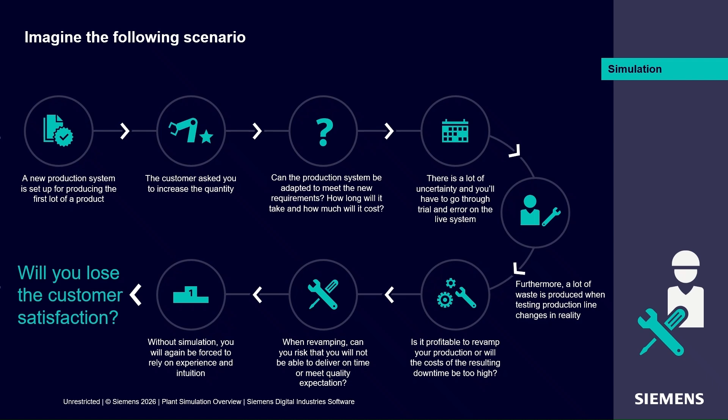This is exactly where simulation tools like Plant Simulation step in, helping you test, optimize, and validate what-if scenarios, and you can validate them virtually before they actually happen in the real world, essentially making mistakes at your desk and saving a huge amount of money.

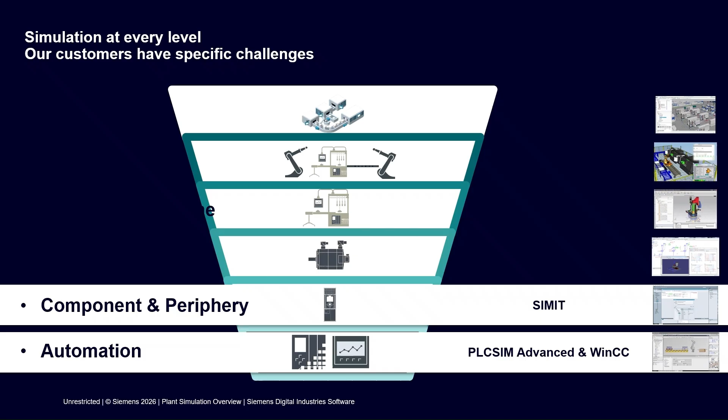PLCSIM Advanced and WinCC enable virtual commissioning and realistic HMI validation against the digital model. At component and periphery level, SIMIT provides realistic simulation of control systems and plant behaviors for testing, and at the component physics level, Simcenter Amesim accurately models physical behavior such as hydraulics, pneumatics, and thermodynamics.

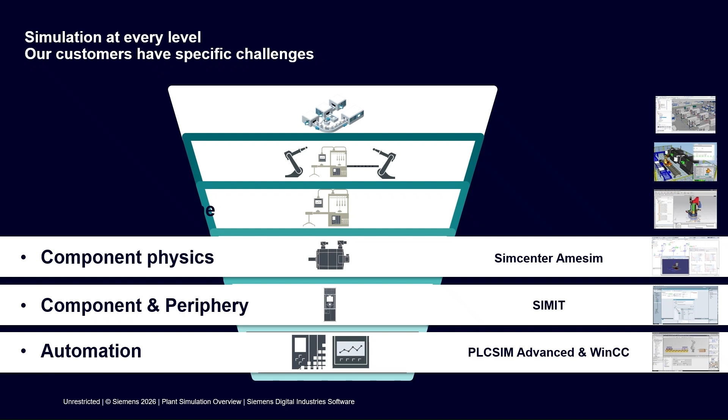NX, which is our CAD platform, and in particular Mechatronic Concept Designer, lets you integrate mechanical design with automation logic to de-risk your machine performance very early. At the robotic cell level, we have Tecnomatix Process Simulate, which allows you to validate your robot paths, human ergonomics, reachability, and cycle times before commissioning.

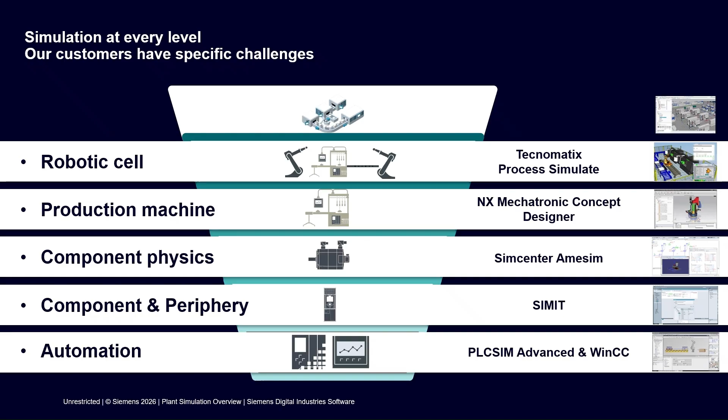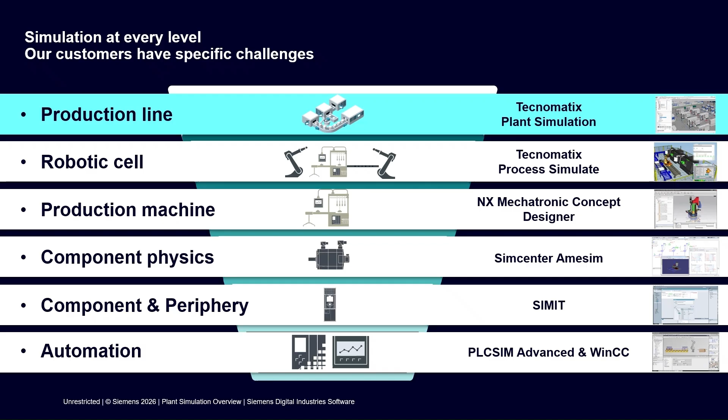And at the production line level, which is our primary focus today, Tecnomatix Plant Simulation enables end-to-end material flow modeling, throughput analysis, and system-level optimization of entire factories. Tecnomatix Plant Simulation is a very powerful discrete event simulation tool.

It allows us to virtually model the entire production environment, including your resources, logistics, staff shift patterns and calendars, and your material flow. With these digital twin models, we can simulate different scenarios and evaluate key performance indicators like throughput, bottlenecks, utilization of your resources, all without disrupting the real system.

We can simulate two types of environments, deterministic and stochastic modeling. In deterministic modeling, you're using fixed inputs, for example, fixed cycle times, fixed transport times, and fixed breakdown intervals. This is useful for your baseline analysis, but it does not reflect real-world variability.

Stochastic modeling, that's where PlantSim truly excels, introduces randomness, uncertainty, and variability. For example, variable process times, machine failures, repair times, and arrival patterns, and you can simulate that all at once. PlantSim's rich distribution libraries, random number streams and experiment manager allow you to run hundreds and thousands of what-if scenarios to understand your risk, your variability, and performance ranges rather than a single point answer.

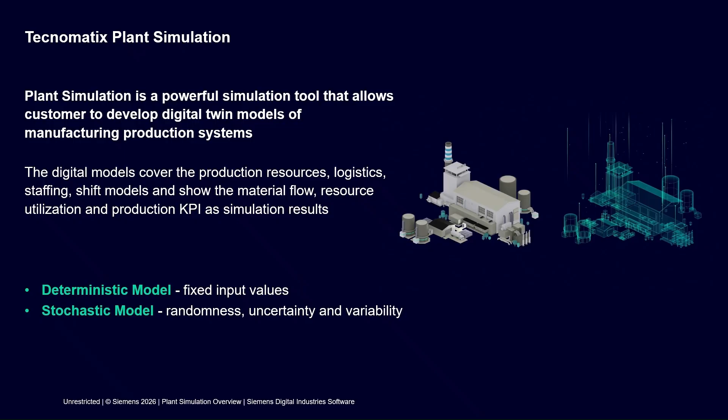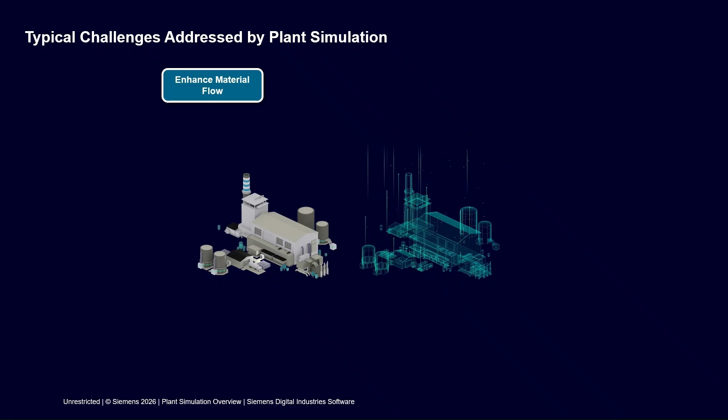Typical challenges which are addressed by Plant Simulation are as follows. You can enhance material flow by simulating different material handling paths for your AGVs, conveyors, and forklifts. You can reduce your throughput time by achieving continuous and efficient material flow, and by minimizing idle times, we can maximize your throughput. And we can look at reducing capital expenses, reducing your footprint, looking at your carbon footprint in Plant Simulation using your analysis tools.

You can optimize your buffers, WIP storage challenges as well, and also process interdependencies, capturing all the dependencies between processes, performing bottleneck analysis and dependency mapping to evaluate how delays or failures in one area affect overall operations, and most importantly, making data-driven decisions because you can rely on measurable insights rather than assumptions or intuition. You can optimize control strategies.

You can look at virtual commissioning, where you can also emulate a PLC to verify your PLC code. Before deploying the code to a physical machine, you can virtualize everything with Plant Simulation and validate it.

And also looking at your worker and operator analysis and your buffer strategies, simulating and testing buffer zones at critical production stages to ensure efficient WIP storage, analyzing buffer capacities under varying production rates to prevent overflow or underutilization, and you can look at optimized buffer placements to reduce transport time and improve overall flow.

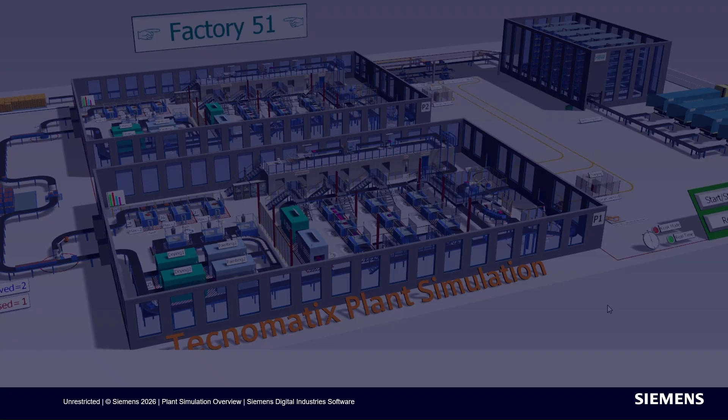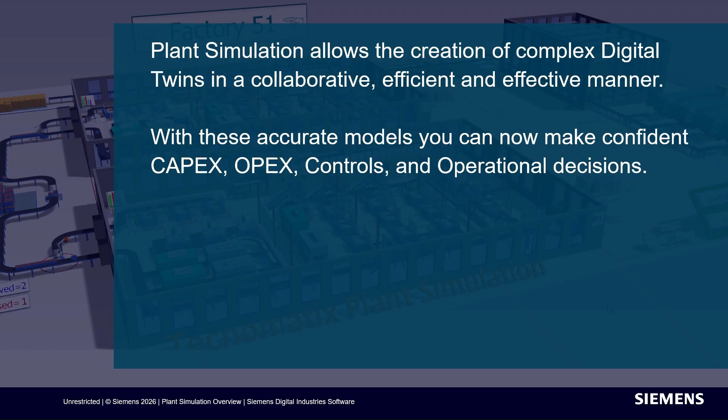Plant simulation enables the creation of high-fidelity digital twins of your production systems in a collaborative, efficient, and scalable way. They are not your static models. They are data-driven, dynamic representations of your real factory, allowing you to make confident CapEx, OpEx, and operational decisions based on evidence rather than assumptions.

What makes plant simulation particularly powerful is its object-oriented architecture, hierarchy, and inheritance, because this ensures models are structured, reusable, and maintainable, even as systems grow in complexity over time. Its control logic flexibility allows you to accurately represent real automation, material flow, and operation rules, keeping your digital twins transparent, predictable, and reliable across the entire production or facility lifecycle.

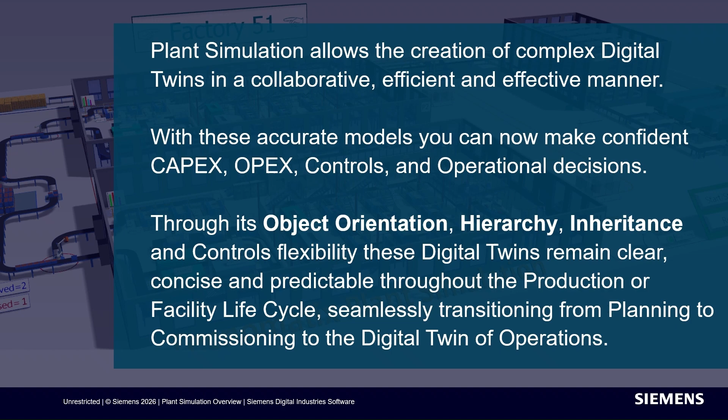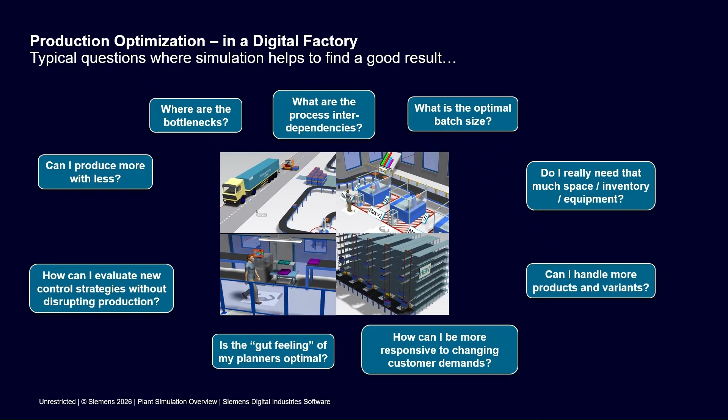This means you can seamlessly transition from early planning and design through commissioning and into digital twin of operations, continuously improving performance long after go-live. Plant simulation helps you answer your toughest production optimization questions before making real-world changes. It reveals true bottlenecks and process interdependencies across the entire production system, and allows you to run what-if scenarios such as batch size, layout, staffing, and equipment needs. You can also evaluate new control strategies safely in a virtual environment, helping you design a more flexible, efficient system that can handle higher product variety and changing customer demand.

PlantSim is designed to be open, interoperable, and software agnostic, meaning it can connect to virtually any digital ecosystem rather than being locked into a single platform. Beyond the core interfaces like OPC UA, PLCSIM Advanced, and MQTT, PlantSim can support a wide range of additional connectors like REST APIs, SQL databases, XML, CSV, and direct links to your MES, ERP, and data lakes. It can integrate with IoT platforms such as Siemens' own Insights Hub, as well as third-party IoT and analytics systems, allowing you to pull live operational data into your digital twin, or the other way around, push simulation results back into your enterprise systems.

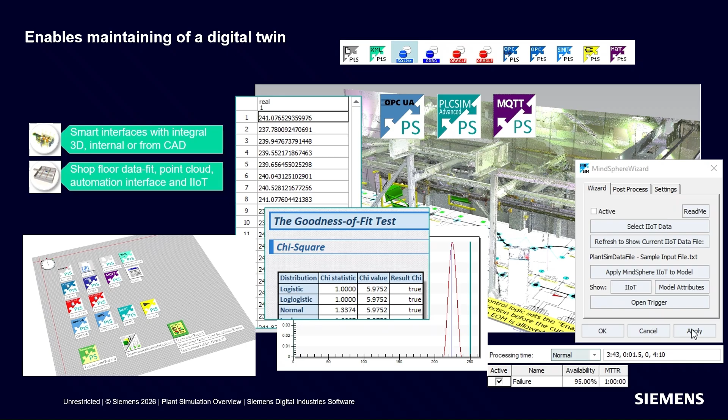With built-in visual analytics, automated utilities, and integrated reporting, PlantSim turns complex simulation results into clear, actionable insights that you as engineers, planners, and managers can trust. Using tools like the Sankey diagram, you can visualize material and transport flows across the factory, identify inefficient routes, and quantify improvements, such as transport distances and increasing throughput. The data fit capability allows you to statistically match real production data to simulation inputs, ensuring your digital twin reflects reality with a high level of accuracy.

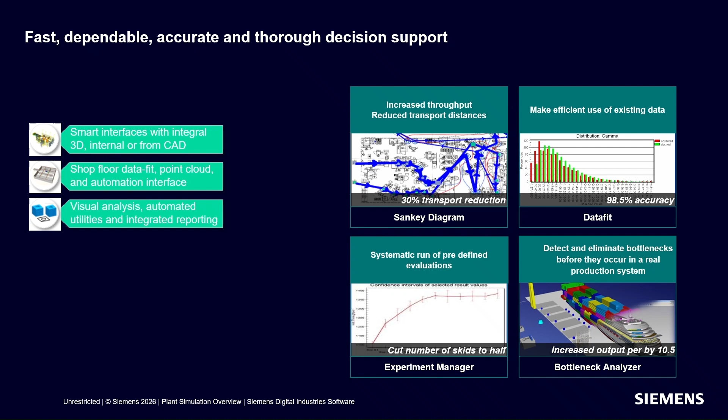Experiment Manager enables systematic automated evaluation of multiple scenarios so you can test alternatives at scale and make confident decisions based on robust results. The bottleneck analyzer helps you detect and eliminate constraints in the virtual model before they occur in a real production system, enabling a proactive rather than reactive approach. Using Layout Optimizer, you can intelligently reposition resources to improve material flow, reduce transport distances, and eliminate unnecessary movements, leading to faster and more efficient operations. Energy Analyzer allows you to assess and optimize energy consumption at system level, helping reduce operational costs and improve sustainability without compromising performance.

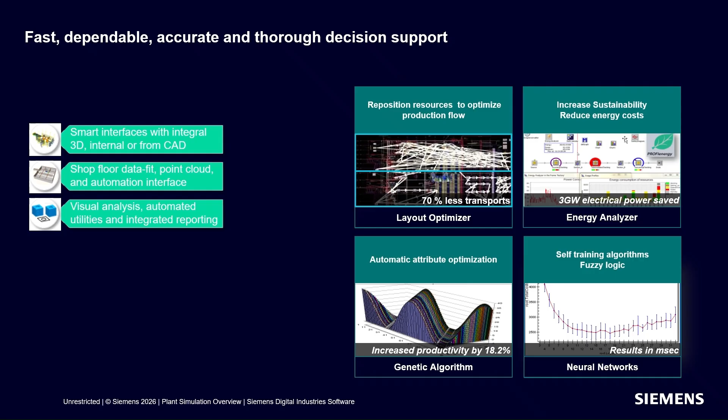GA, which is genetic algorithm, in Plant Sim can automatically optimize key model attributes, like buffer size, staffing levels, or machine parameters, to increase productivity and system efficiency. And with self-learning techniques such as neural networks and fuzzy logic, the system can analyze complex relationships in your data, adapt to variability, and support smarter data-driven decisions in milliseconds.

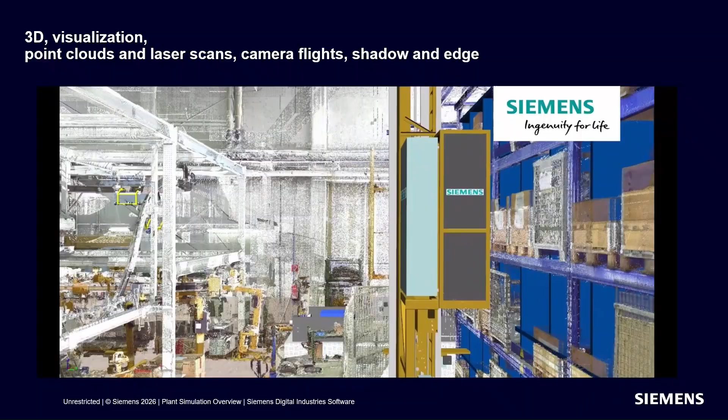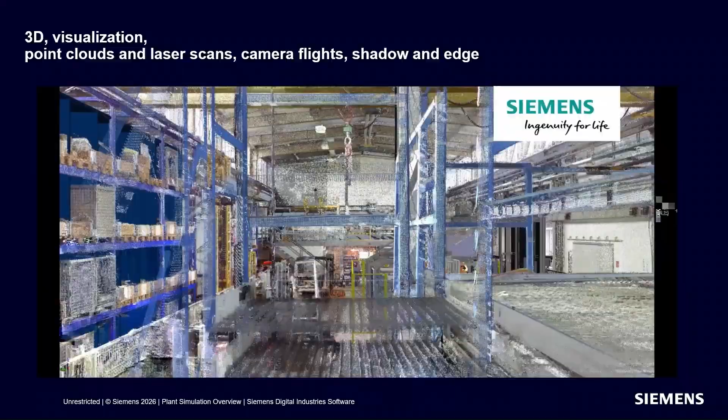Plant simulation can work directly with point cloud data, allowing you to build digital twins tightly aligned with the real shop floor. Point clouds provide an accurate as-built representation of your facility, capturing actual machine positions, structural elements, conveyors, and clearances, rather than relying on idealized 2D CAD layouts. PlantSim can import, visualize, and reference these point clouds as the spatial foundation of your model, ensuring realistic placement of equipment and material flow paths. By combining point cloud data with simulation objects, you reduce modeling errors, improve spatial accuracy, and accelerate model creation significantly.

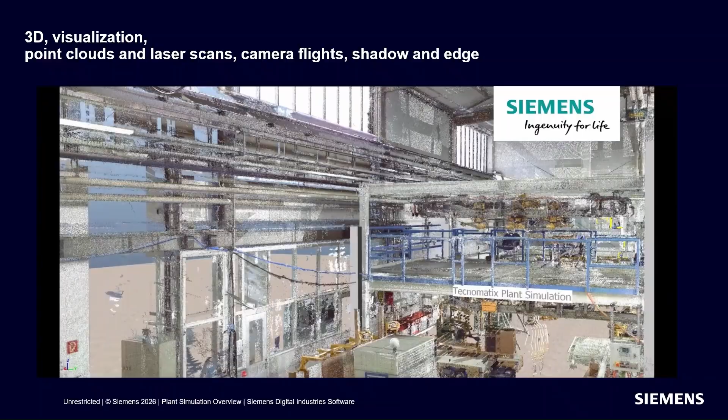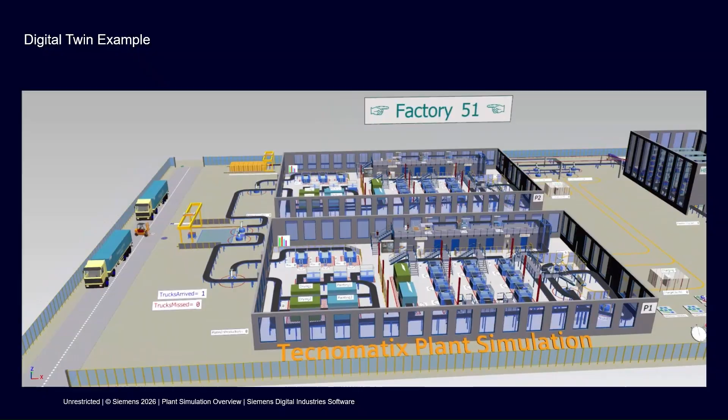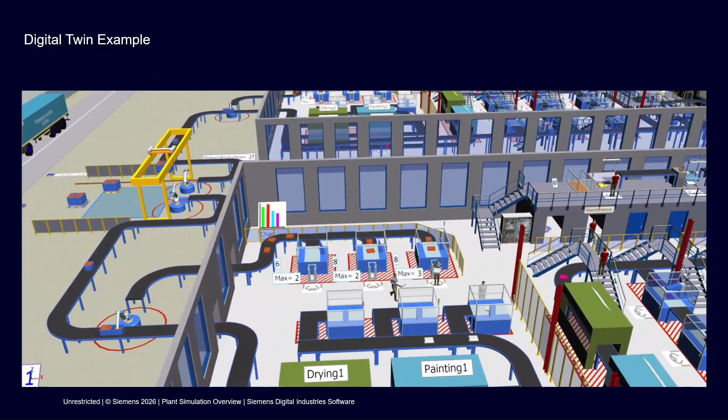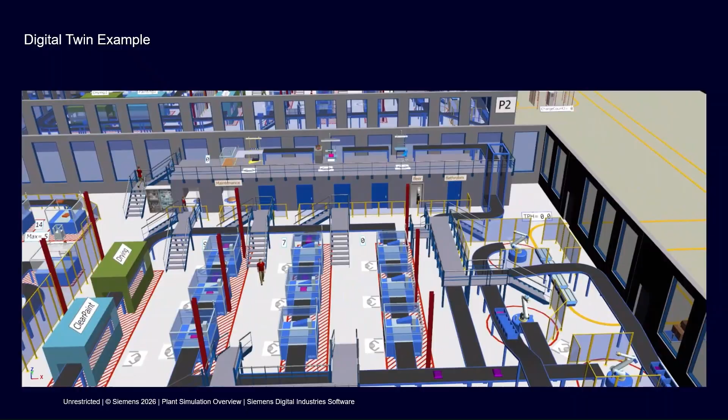As you can see here, Factory 51 is a complete digital twin example of a real manufacturing facility, all built in plant simulation. On the left, you can see the incoming material and logistics area, where raw parts enter the factory and are routed to different production lines. In the center is the main production line, where multiple workstations, processes, and parts in sequence are working, each with realistic cycle times, capacities, failures, and possible breakdowns. As the material moves through the system, you can clearly see buffers and WIP buildups, which helps you visually identify where bottlenecks occur in real time.

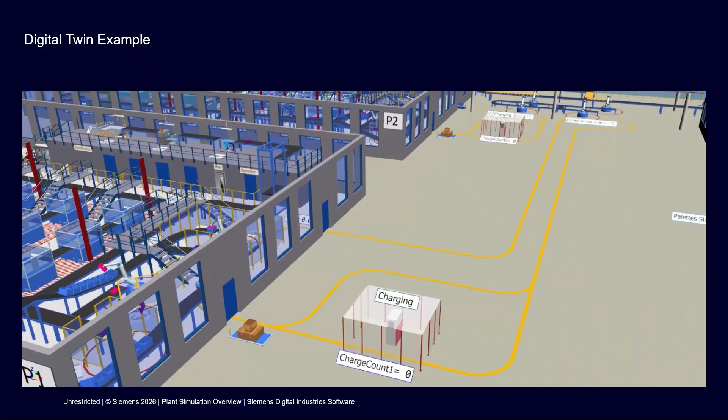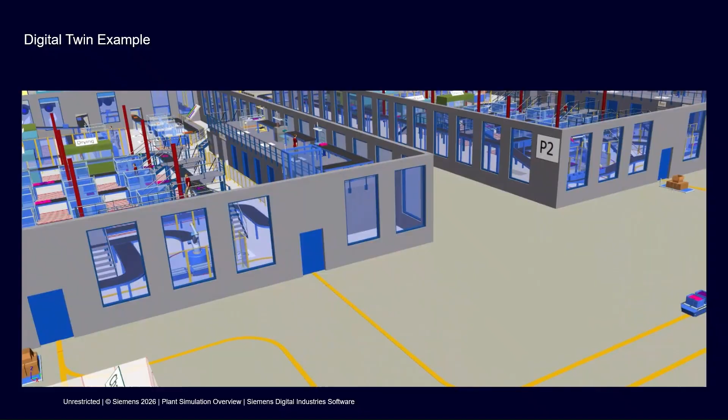You can see internal transport systems such as conveyors or AGVs, automated guided vehicles, moving parts between stations, allowing you to analyze transport distances and efficiency. At the top of the model, you can simulate different shift patterns and staffing levels, showing how labor availability impacts your overall throughput.

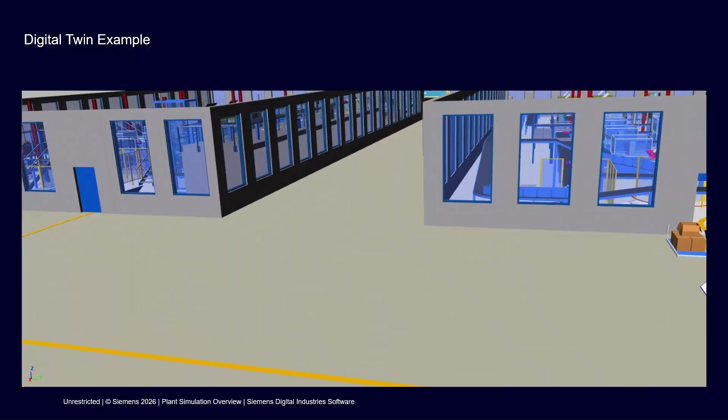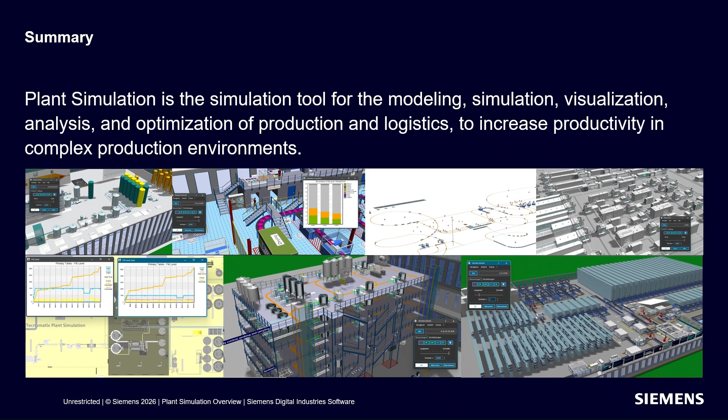In summary, Siemens Plant Simulation is a comprehensive platform for modeling, simulation, visualization, analysis, and optimization of your production and logistics systems in complex manufacturing environments. As you can see across the visuals on this slide, PlantSim is used for many different types of production systems, from discrete manufacturing lines to process industries, warehouses, and large-scale logistics networks. It allows you to build highly realistic digital twins that represent material flow, machines, transport systems, buffers, staffing, and control logic in one integrated model.